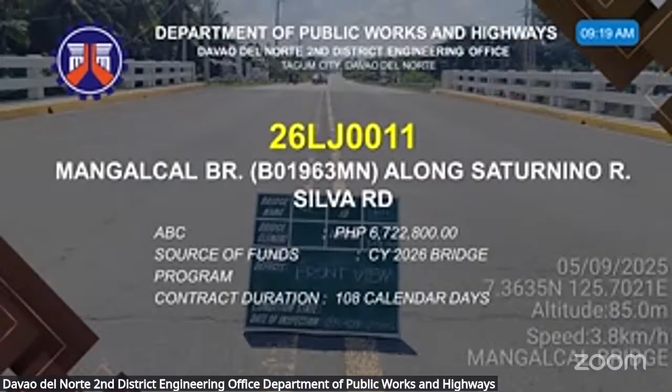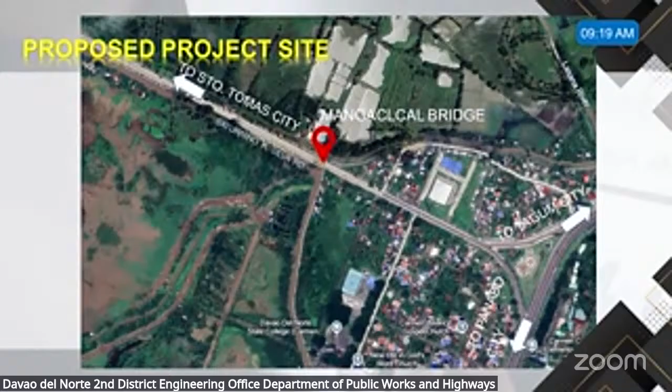This is the proposed project site. The retrofitting project for the bridge is located at Ising, Carmen, Davao del Norte. This is the location plan of the bridge, and this is the scope of works with geotag photos.

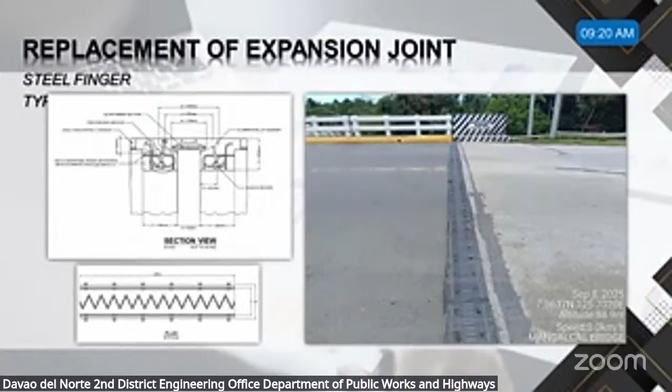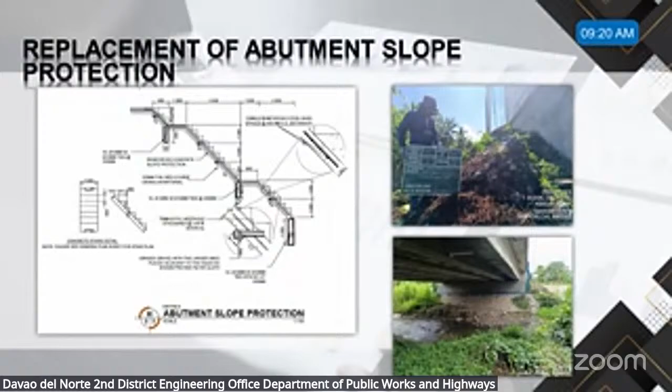The first scope is replacement of expansion joint from rubber type to steel finger type. This is a sample of the newly installed expansion joint. The second scope is replacement of abutment slope protection, both abutment slope protections of the bridge.

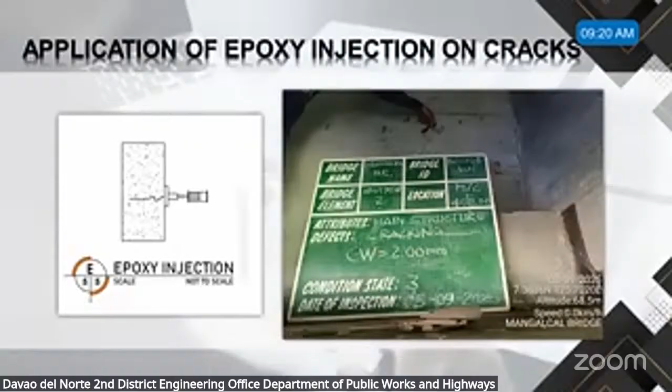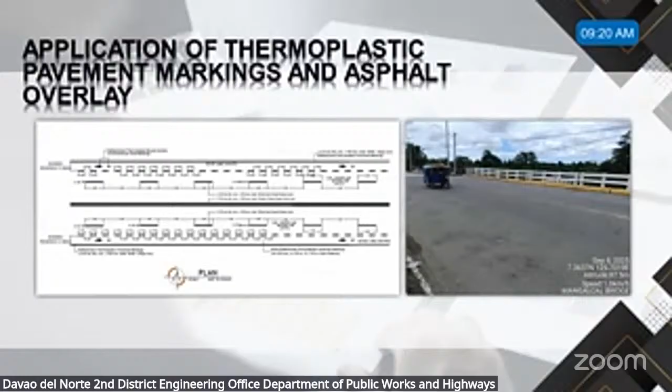Next is the application of epoxy injection on cracks, cement patching, and asphalt overlay of the bridge, followed by application of thermoplastic pavement markings due to the asphalt overlay, and installation of solar street lights.

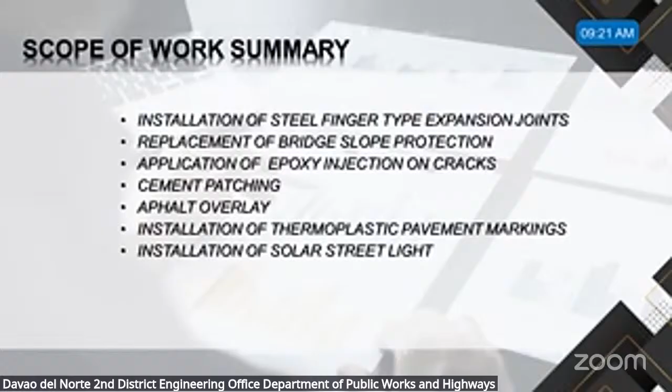This is the summary of the scope of works of the project. That's all, Mr. Chair, thank you.

Thank you. So, do we have queries, questions, clarifications regarding the presented project? Hearing none, then thank you, engineer. Let us now proceed with the second project, 26LJ0012.

Good morning, Mr. Chair. Good morning, everyone. I'm Archie Reyes from Planning and Design Section. I'm here to present Penaplata Bridge, B00027MN along Babak Samal Kaputian Road, with a contract ID of 26LJ0012, with an ABC of 4,802,000. Source of fund CY 2026 Bridge Program with a contract duration of 96 calendar days.

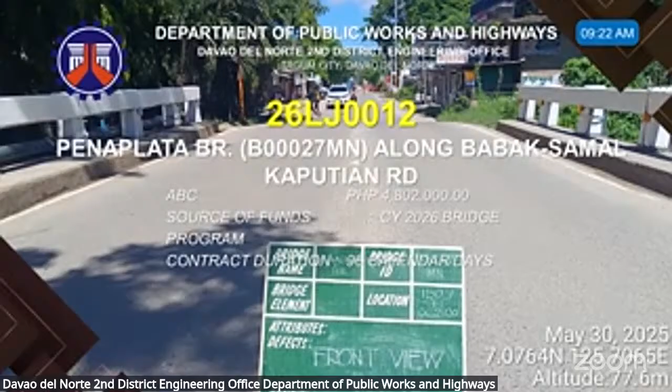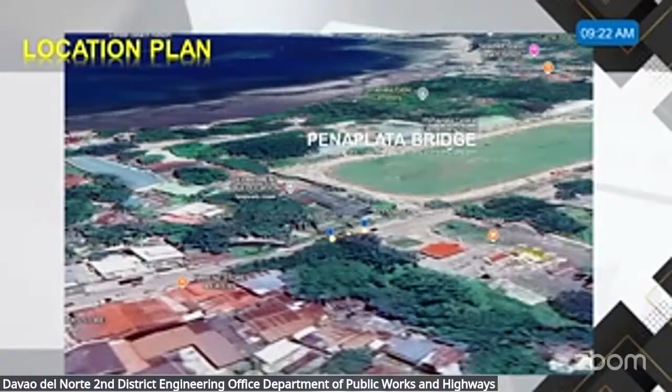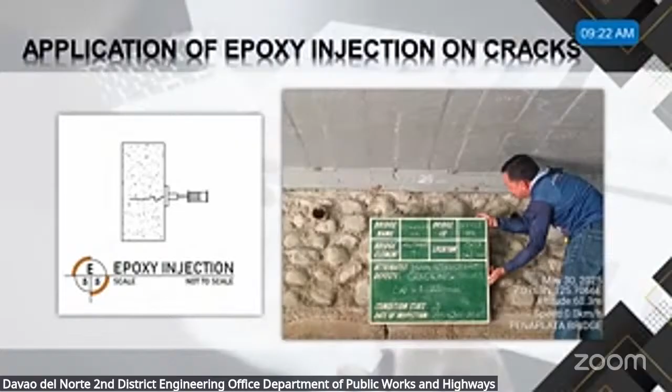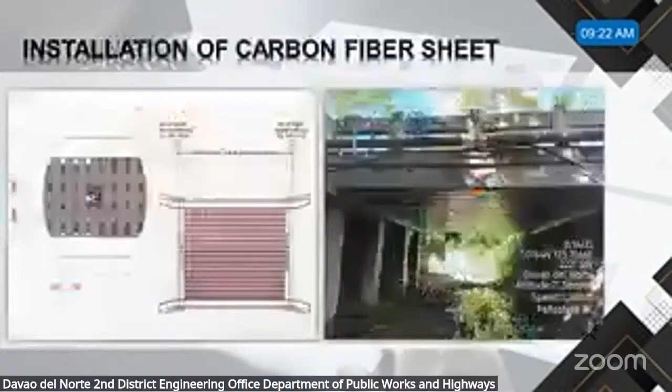This is proposed project site at Barangay Penaplata and location plan. Scope of works and geotag photos. Application of epoxy injection on cracks at the main structure, abutment 1, and cement patching. Installation of carbon fiber sheet at the deck slab.

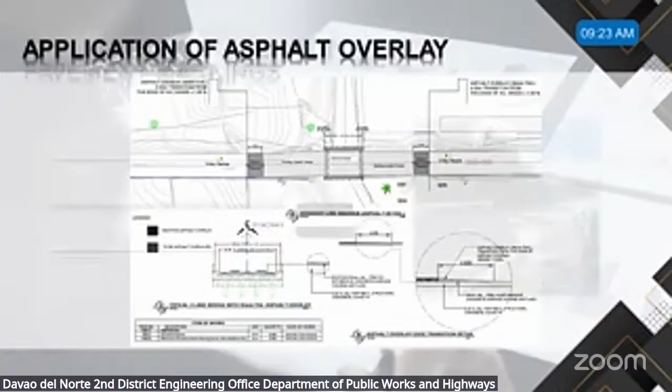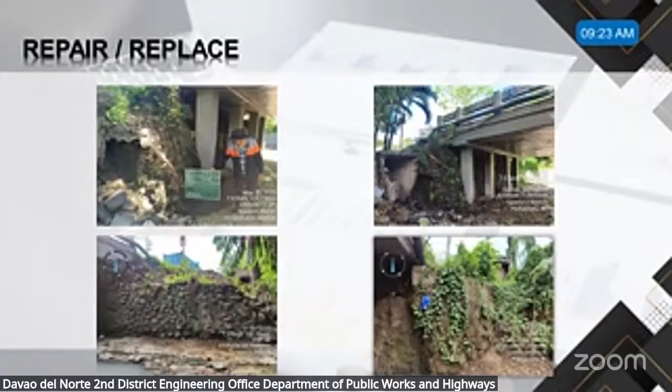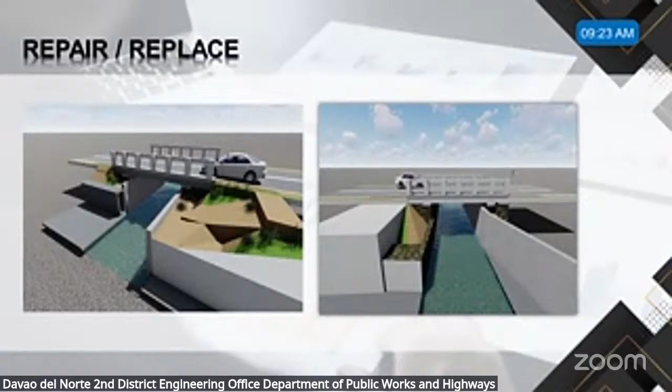Application of asphalt overlay. Only asphalt overlay sa transition lang, Mr. Chair, na 4 meters transition. Application of thermoplastic pavement markings. And replace and repair sa existing damage sa concrete canal and sa slope protection. And mao ni ang final nga output sa pag-repair. And also solar street light.

Okay, so our asphalt overlay would be on the transition area, transition lang? Yes, both, sir. Okay, Chair, okay na. So do we have any other queries, clarifications regarding the presented project? Hearing none, so thank you, engineer.

Let us now proceed with the third project. Good morning, Mr. Chair. Good morning, everyone. I am Darwin Milimida from Planning Design Section with a contract ID of 26LJ0030, NRJ Tagum Road, Panabo, Pag-asa, Kapalong Road, Kimamon, Santo Tomas, Lungaog Road, Salvacion, San Miguel, Santo Tomas Road, connecting Panabo Wharf to Banana Industries, Santo Tomas, Davao del Norte, 0 plus 000 to 0 plus 600, with the ABC of 14,119,000.

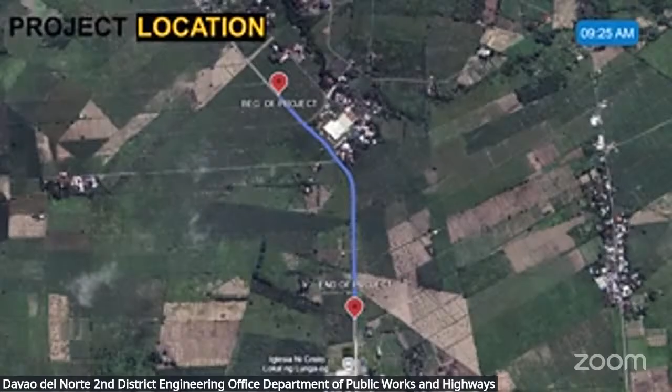Source of funds, CY 2026, Roads Leveraging Linkage for Industries and Trade Infrastructure Program, or ROLL-IT. Contract duration, 98 calendar days. Net length, 600 linear meter. This is the project location, typical roadway section. Scope of work is concreting of road, 3.350 width, 0.28 thickness PCCP, open line canal at right side, 0.8 width, application of reflectorized thermoplastic pavement markings, paving of shoulder 1 meter width and 0.15 thickness.

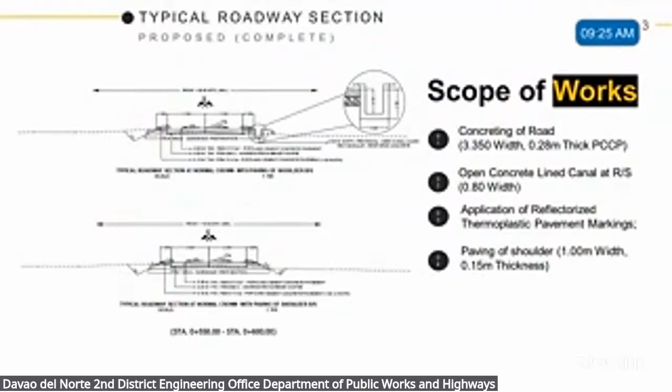This is the geotag photos. End of presentation, Mr. Chair. Thank you. Do we have queries, questions, clarifications from our prospective bidders and or the BAC members regarding the presented project? Hearing none, then thank you, engineer. Let us now proceed with the fourth project.

Good morning again, Mr. Chair. Good morning, everyone. With a contract ID of 26LJ0036, Tagum Panabo Circum Road, kilometer 1517 plus 165 to kilometer 151900, with the ABC of 141,885,000. Source of funds, FY 2026 GAA 001 Rehabilitation Construction, Upgrading of Damaged Paved Roads and Secondary Roads. Contract duration, 365 calendar days. Net length is 1,763 linear meter or 7.05 lane km.

This is the road project location, typical roadway section. Scope of works is reconstruction of 4 lanes, 1,763 linear meter road. Width is 13.4 meters. Thickness is 300 mm with macrosynthetic fiber. Paving of shoulder both sides with a width of 1.130, thickness 150 mm. Installation of curb and gutter.

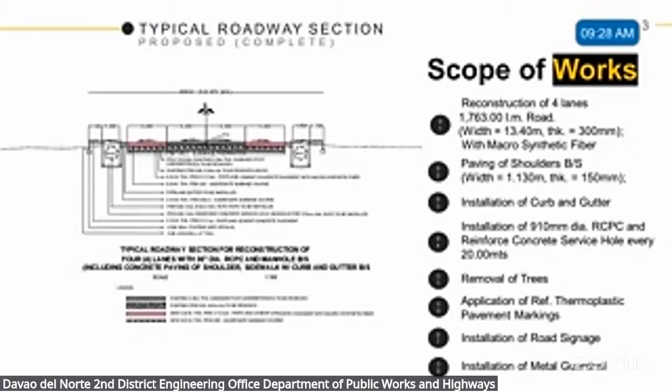Installation of 910 mm diameter RCPC and reinforced concrete service hole every 20 meters. Removal of trees. Application of reflectorized thermoplastic pavement markings. Installation of road signage. Installation of metal guardrails. These are the geotag photos. End of presentation, Mr. Chair.

Thank you. So do we have queries, questions, clarifications regarding the presented project? Hearing none, then thank you, engineer. Let us now proceed with the fifth project.

Hello. Good morning, Mr. Chair. Good morning, everyone. I am Anthony Ingito from the Planning and Design section, here to present the project with the contract ID 26LJ0037, Tagum Panabo Circum Road, kilometer 1519 plus 948, to kilometer 1521 plus 700, with an ABC of 139,139,490. The contract duration is 365 calendar days, and the drainage length is 3,334 linear meters. The source of fund is the FY 2026 GAA Asset Preservation Program.

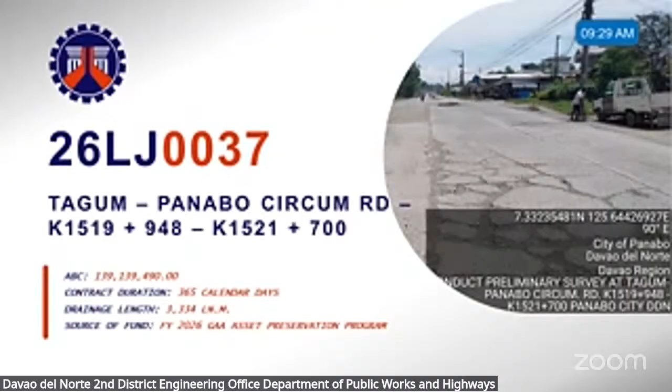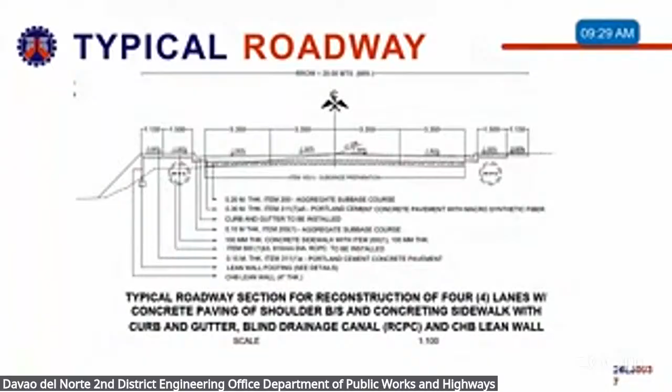This slide shows the project location, beginning from Barangay Nanyo and ending at Barangay Southern Davao and Panabo City. This is the typical roadway section. The scope of works include the reconstruction of the 4 lanes, a total of 1,768 linear meter road with macrosynthetic fibers.

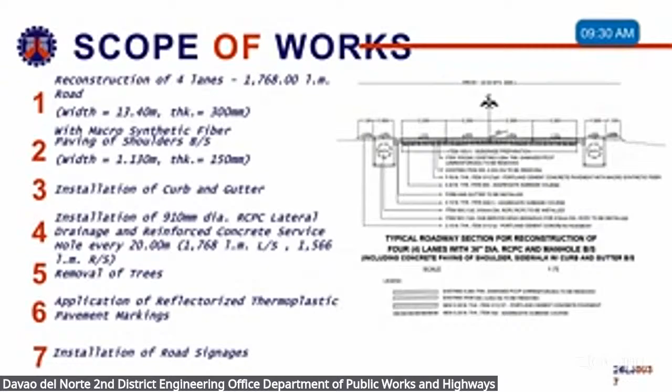Second one is the paving of shoulders both sides. Third is the installation of curb and gutter. The installation of 910 millimeters diameter RCPC lateral drainage and reinforced concrete service hole every 20 meters, removal of trees, application of reflectorized thermoplastic pavement markings, and the installation of road signages. These are the geotag photos from the site.

End of presentation. Thank you.

Thank you, engineer. So do we have queries, questions, clarifications regarding the presented project? Hearing none, then let's proceed with the sixth project.

This is the project location plan.

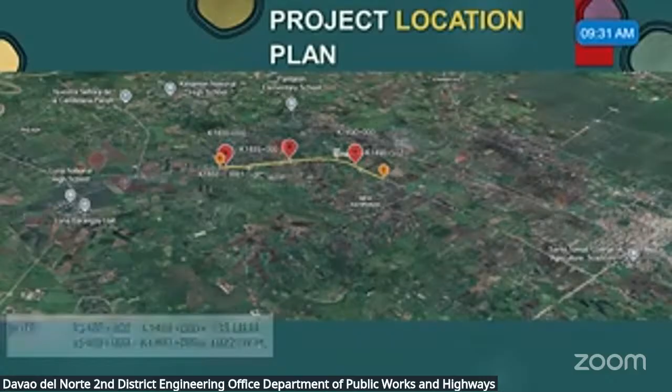Scope of works: concrete widening of roads both sides, with a width of 3.35 meters per lane and a thickness of 0.28 meters. Concrete paving of shoulders both sides, with a width of 1.13 meters and a thickness of 0.15 meters. Construction of curb and gutter, sidewalk, CHB lean wall, removal of structures and obstruction, removal of trees, application of reflectorized thermoplastic pavement markings, extension of box culvert both sides, extension of 36 inches RCPC cross drain both sides, installation of 910 mm or 36 inches lateral RCPC. This is the typical roadway section.

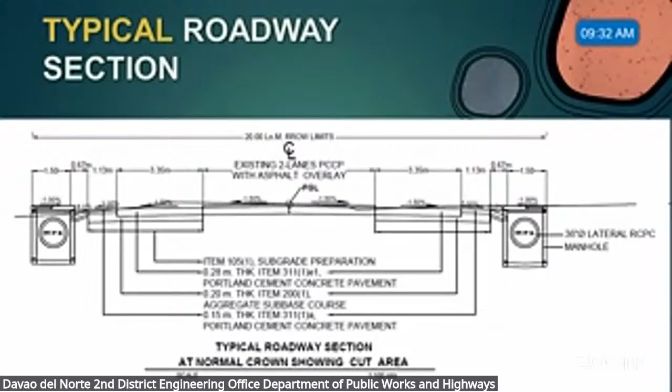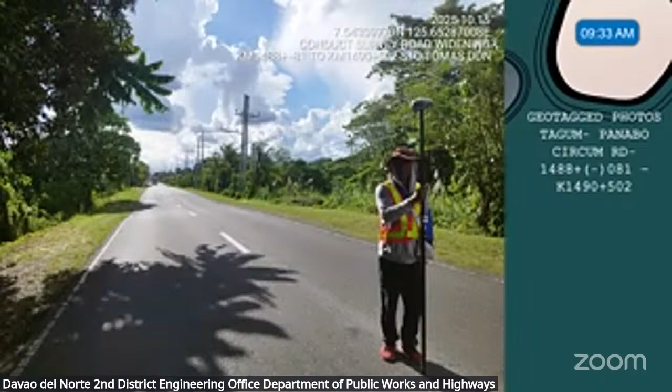These are the geotag photos in Tagum Panabo Circum Road. End of presentation. Thank you.

Thank you, engineer. So do we have queries, questions, clarifications regarding the presented project? Hearing none, then thank you very much. Let us now proceed with our last project.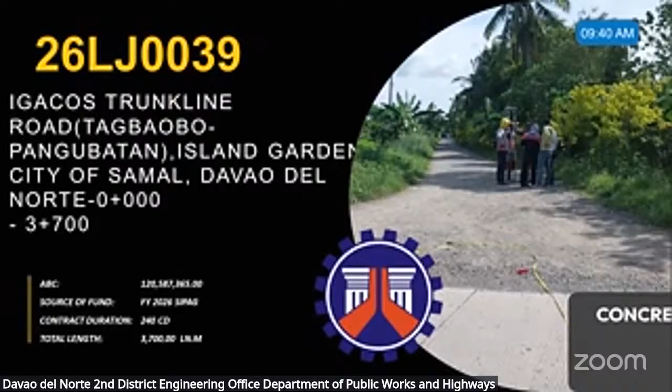This is the project location plan.

Scope of works: clearing and grubbing, removal of trees, excavation, embankment works, soft rock materials, removal of damaged old pavement road 5 meters with a width of 0.20 meters thickness. Concreting of 3,700 linear meter road, width of 6.7 meters, thickness 0.28 meters. Gravel shoulder, intermittent, width of 1.5 meters both sides, thickness 0.15 meters. Widening of lane, 0.85 meters both sides for existing 2 lanes. Concrete paved shoulder, intermittent, width of 1.5 meters both sides, thickness 0.15 meters. Construction of concrete lined canal, intermittent, and construction of concrete slope protection, intermittent. Installation of road signs, chevron signs, metal guardrails, application of reflectorized thermoplastic pavement markings.

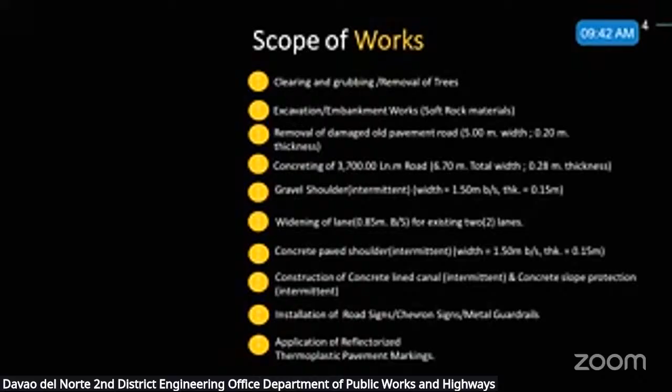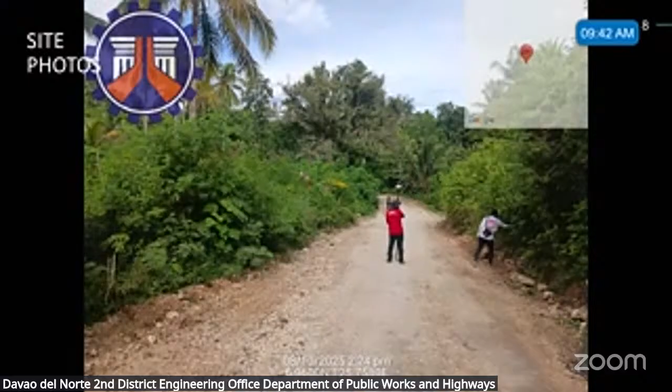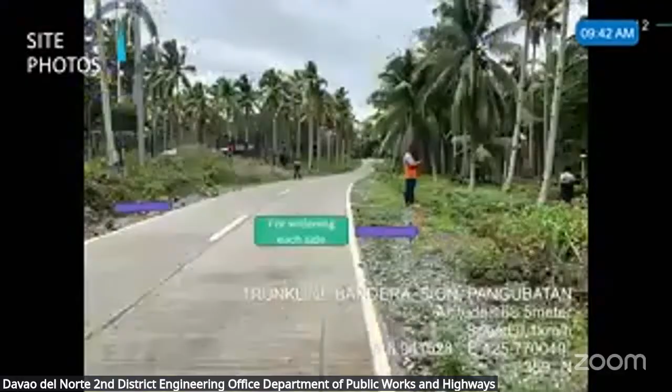These are the geotag photos. End of presentation.

Do we have any inquiries with regards to the project? Hearing none, so that is the end for our pre-bid conference for this morning.

We shall proceed with the... sige, so we shall now... wala pa? Sa oras pa? Okay. So we still have 15 minutes. Ay, oo, tama. Pre-bid, no? Sorry. So, since this is pre-bid conference, we shall now proceed to the reminders of our prospective bidders. TWG, please.

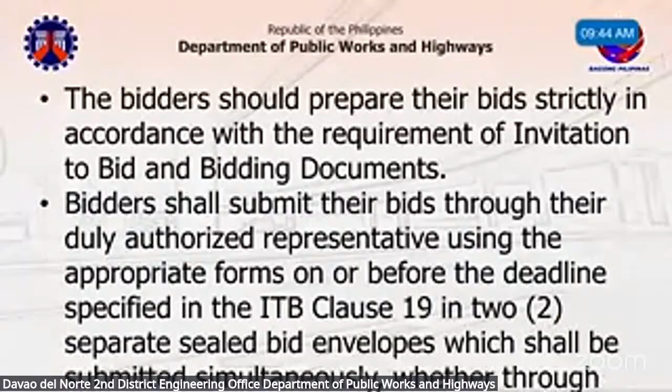Reminders for our prospective bidders. The bidders should prepare their bids strictly in accordance with the requirements of the invitation to bid and bidding documents. Bidders shall submit their bids through their duly authorized representative using the appropriate forms on or before the deadline specified in ITB Clause 19, in two separate sealed bid envelopes which shall be submitted simultaneously, whether through manual or online submission. The first shall contain the technical component of the bid, including the eligibility requirements under ITB Clause 12, and the second shall contain the financial component of the bid. Online submission is applicable for civil works projects only. Bidders must select only one mode of submission, either manually or electronically. For bids submitted online or electronically, procedures should observe Department Order Number 87, Series of 2020.

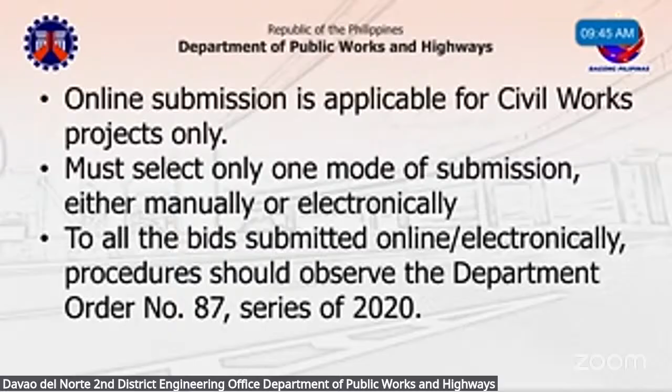For the technical proposal, the first bid envelope shall contain the following technical documents, including the eligibility documents: PhilGEPS Certificate of Registration or Platinum Membership in accordance with Section 20 of the IRR, Special PCAB License and Registration in case of joint venture, statement of all its ongoing government and private contracts, including contracts awarded but not yet started, if any, whether similar or not similar in nature and complexity to the contract to be bid.

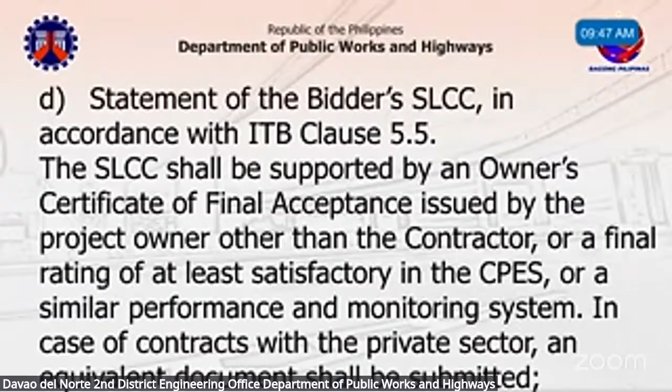Statement of the bidder's SLCC in accordance with ITB Clause 5.5. The SLCC shall be supported by an owner's certificate of final acceptance issued by the project owner other than the contractor, or a final rating of at least satisfactory in the CPES, or a similar performance and monitoring system. In case of contracts with the private sector, an equivalent document shall be submitted.

NFCC computation in accordance with ITB Clause 5.6, Joint Venture Agreement or JVA if applicable, bid security in the prescribed form and amount in accordance with ITB Clause 16, and validity period under ITB Clause 15.

Project requirements which shall include the following: duly signed organizational chart of the personnel to be deployed for the procurement project to be bid, duly signed list of contractor's personnel - project manager, project engineers, materials engineers, and foremen to be assigned to the procurement project to be bid with their complete qualifications and experience data. These personnel must meet the required minimum years of experience set in the BDS.

Duly signed list of contractor's major equipment units which are owned, leased, or under purchase agreements, supported by proof of ownership or certification of availability of equipment from the equipment lessor or vendor for the duration of the project, as the case may be, which must meet the minimum requirements for the contract set in the BDS. Signed and notarized omnibus sworn statement in accordance with Section 54.3 of the IRR.

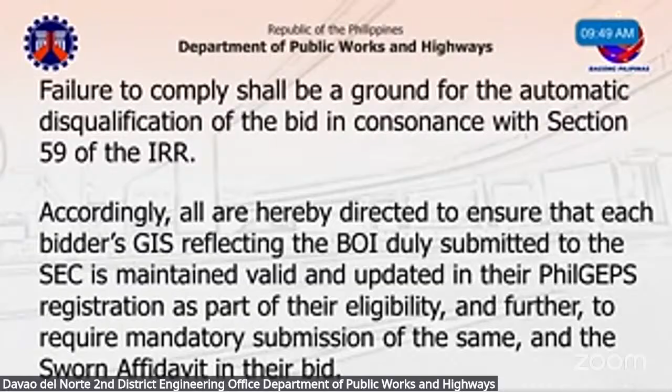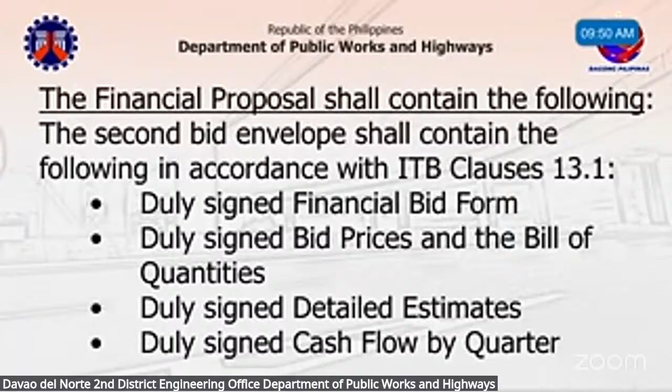For the financial proposal, the second bid envelope shall contain the following in accordance with ITB clause 13.1: duly signed financial bid form, duly signed bid prices and the bill of quantities, duly signed detailed estimates, duly signed cash flow by quarter. All bids that exceed the ABC shall not be accepted and shall be automatically rejected at bid opening. All notarized documents must be dry sealed and signed by its authorized signatory.

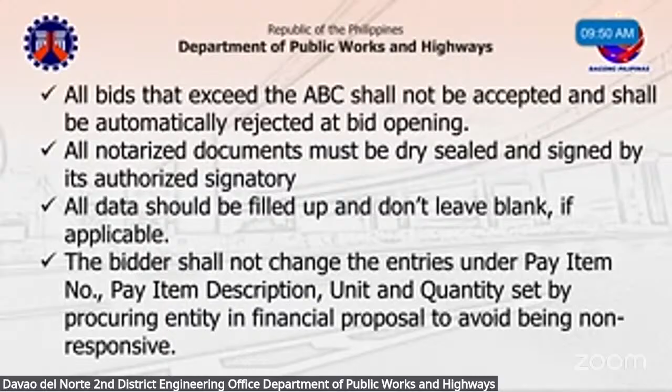All data should be filled up and don't leave blank if applicable. The bidder shall not change the entries under pay item number, pay item description, unit, and quantity set by the procuring entity in the financial proposal to avoid being non-responsive.

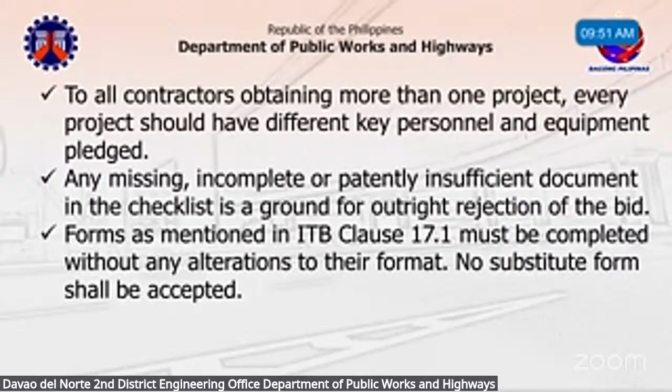To all contractors obtaining more than one project, every project should have different key personnel and equipment pledge. Any missing, incomplete, or patently insufficient document in the checklist is a ground for outright rejection of the bid. Forms, as mentioned in ITB Clause 17.1, must be completed without any alterations to their format. No substitute form shall be accepted.

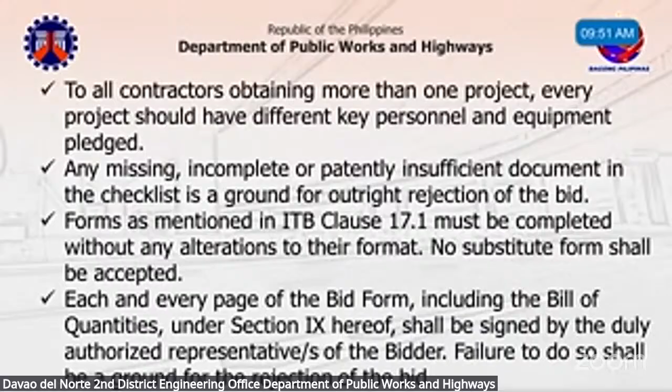Each and every page of the bid form, including the bill of quantities under Section 9 hereof, shall be signed by the duly authorized representatives of the bidder. Failure to do so shall be a ground for the rejection of the bid. The first and second envelopes must be properly marked and sealed. Any insertions, erasures, or overwriting shall be valid only if they are signed or initialed by the duly authorized representative of the bidder.

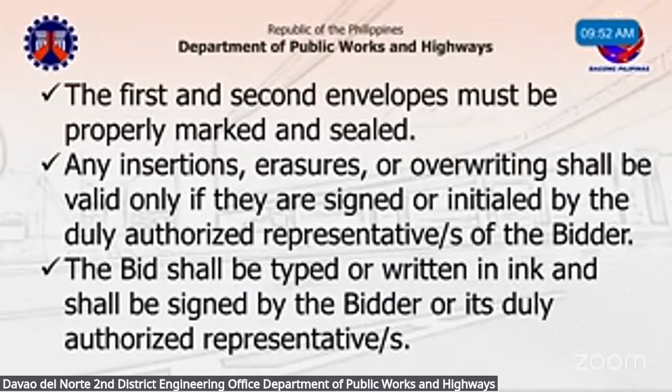The bid shall be typed or written in ink and signed by the bidder or its duly authorized representative. If a proposed key technical personnel is an employee of the bidder and working on another project at the time of bidding, the bidder shall submit a certification that: 1. The personnel shall be pulled out from the ongoing project once the bidder is awarded the contract, and 2. He or she shall be replaced with another person with equal or better qualifications as certified by the head of the implementing office. The bidder may propose a key technical personnel who is not its employee, provided that said personnel submits a certification that he or she will work for the bidder if awarded the contract under bidding.

This is pursuant to Department Order Number 9, Series of 2012. As per Department Order Number 58, Series of 2012, all prospective bidders are mandated to state in their bid documents a complete technical description of their pledged equipment, whether owned or leased, such as but not limited to the engine number, year model, chassis number, plate number, production capacity, and load capacity.

In addition, prospective bidders should also state in their bid documents the particular place or site where the equipment is located, as provided for under Department Order Number 9, Series of 2012. If any piece of equipment is not in the location, the bidder shall be post-disqualified.

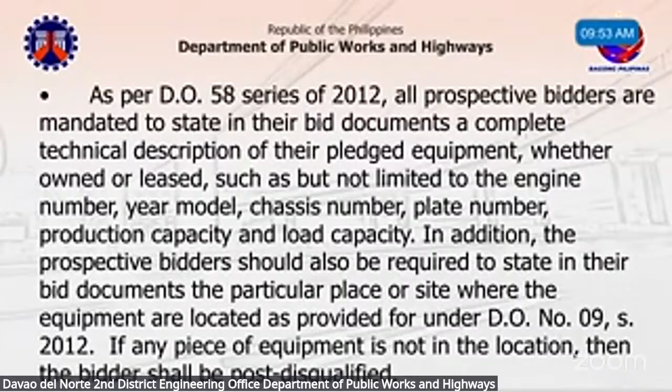Certification of minimum laboratory equipment duly certified by any DPWH office, as per Department Order Number 11, Series of 2017. Bidders must ensure adherence to Department Order Number 110, Series of 2024, for the implementation of the ISO 9001:2015 certification requirement for Large A, Medium B, and Medium A contractors in the procurement of infrastructure projects of the department. Hence, bidders must attach to the technical envelope their ISO 9001:2015 certification. Failure to attach will lead to disqualification of their bid.

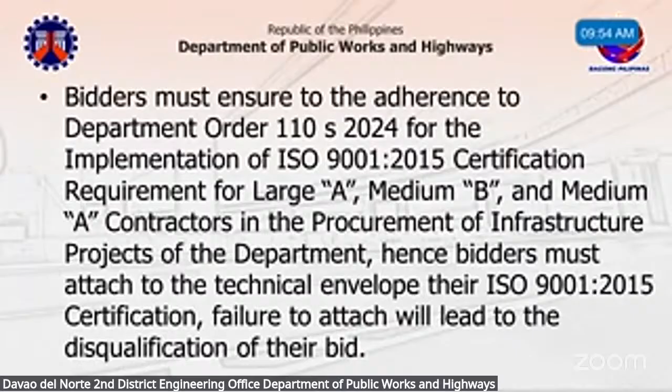This requirement applies to the following size range and their effectivity, to wit: size range Large A, Allowable Range of Contract Cost (ARCC) more than 300 million pesos but less than 450 million pesos, effectivity January 1, 2025. Size range Medium B, ARCC more than 150 million pesos but less than 300 million pesos, effectivity July 1, 2025. Size range Medium A, ARCC more than 30 million pesos but less than 150 million pesos, effectivity January 1, 2026.

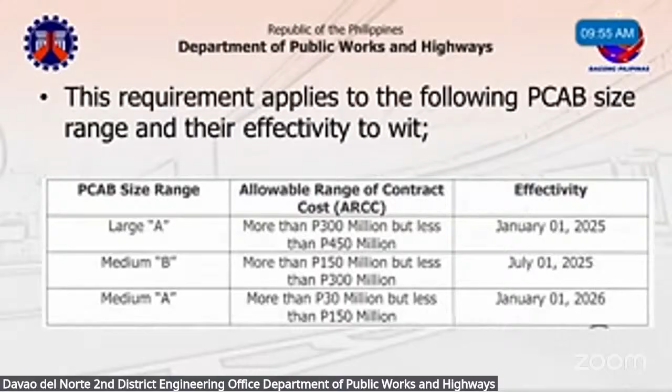Pursuant to Department Order Number 169, Series of 2025, only accredited project engineers may be assigned to DPWH projects, subject to the following limits of assignment. For regional or district offices, classification Project Engineer 2: limit of assignment is 10 contracts located within the same region for simultaneous assignments, with an aggregate cost of 1.5 billion pesos.

For Project Engineer 1: limit of assignment is 10 contracts located within the same region for simultaneous assignments, each costing not more than 150 million pesos, with an aggregate cost of 1 billion pesos. For Provisional Project Engineer: limit of assignment is 10 contracts located within the same region for simultaneous assignments, each costing not more than 100 million pesos, with an aggregate cost of 500 million pesos.

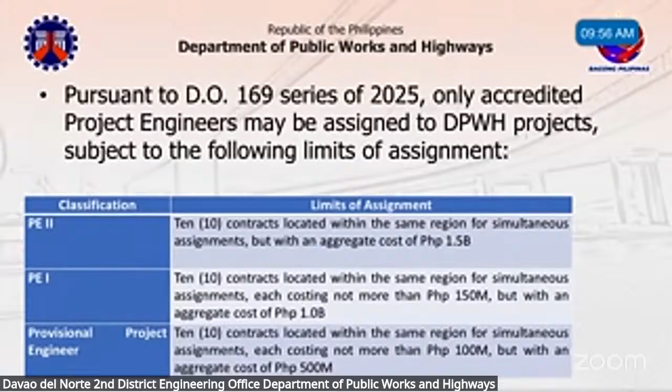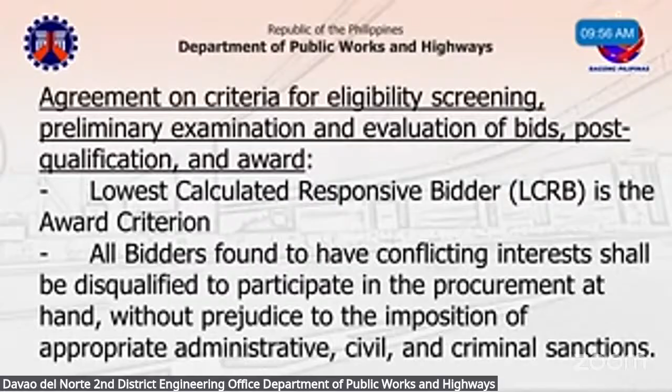Agreement on criteria for eligibility screening, preliminary examination and evaluation of bids, post-qualification, and award: the Lowest Calculated Responsive Bidder, or LCRB, is the award criterion. All bidders found to have conflicting interests shall be disqualified from participating in the procurement at hand, without prejudice to the imposition of appropriate administrative, civil, and criminal sanctions. Bidding will be conducted through competitive bidding procedures using a non-discretionary pass or fail criterion as specified in the IRR, otherwise known as the New Government Procurement Act, or NGPA.

This office reserves the right to reject any and all bids, declare a failure of bidding, or not award the contract at any time prior to contract award, in accordance with Section 70 of RA Number 12009, without thereby incurring any liability to the affected bidder or bidders. The no-contact rule shall be observed. That's all, Mr. Chair.

Thank you, Engineer Moto. Also, to our prospective bidders, please be aware and constantly monitor any supplemental bulletin which might be issued regarding these 7 projects on our DPWH website and on the PhilGEPS.

Okay, do we have any other concerns regarding the civil works project? Regarding the pre-bid of these 7 civil works projects? Hearing none, let us now proceed with the opening of bids for 2 RFQ projects.